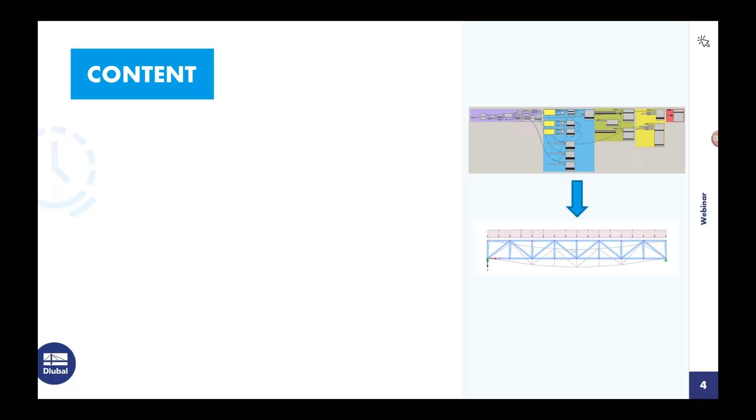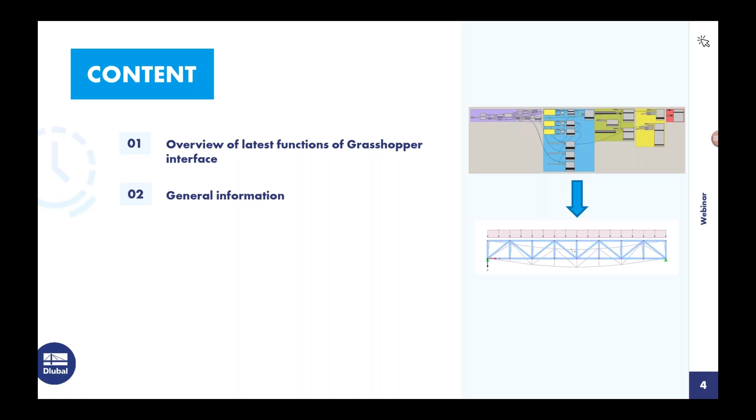Let's have a look at the schedule for today. First, I'd like to start with an update on the latest implementation we developed for the Grasshopper interface. And then I'd like to show some basic information about the installation and the interface itself. And after that, we create a basic geometry in Grasshopper and define all necessary model and load data and export it to RFEM.

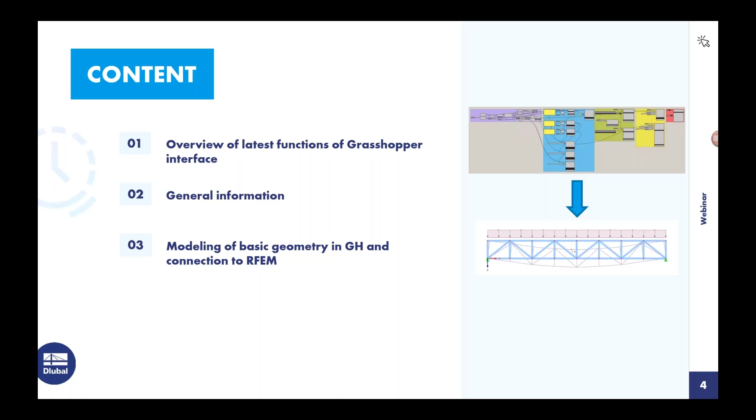So what are the new features we have implemented in the last time? First, when we're using the member component, we can now assign existing design properties to the member for steel and timber design. And these properties are not defined in Grasshopper directly, but we can read them from a template in RFEM. And we have also new components for the definition of imperfections, and at the request of a customer, non-linearities were also implemented in the line hinge component.

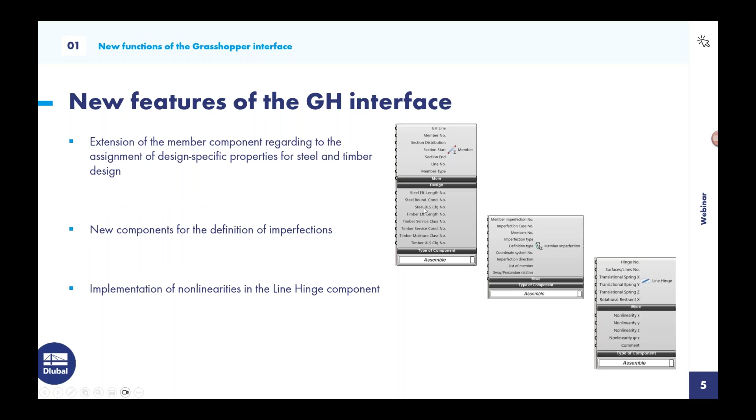And the next new features are that it's now possible to access the templates in RFEM via the export component. So for example, we can now define design properties for steel and timber in a template in RFEM. And these defined design properties we can access with the member component in Grasshopper. And also the export of the polylines has been optimized, and we implemented the new components for closing and opening RFEM files in Grasshopper.

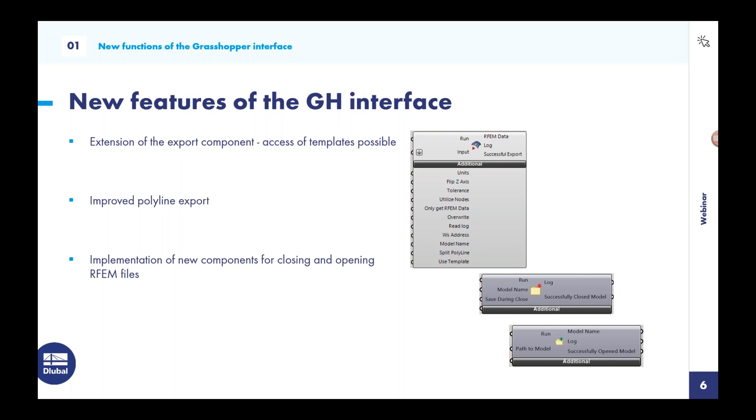And after the installation, we installed two plugins. A plugin for the Rhino RFEM link. With this plugin, we can import and export data between Rhino and RFEM. We can import and export lines and surfaces, and this is limited to the pure geometry. So information about the sections or material thicknesses are not exported with this link.

And in this webinar, we will show you the Grasshopper RFEM link. We have the import and export option as well, with the focus on the export to RFEM components. And the import works in such a way that we are able to read the information defined in RFEM and use it further in Grasshopper. We can export model data like sections, members, thicknesses, hinges, materials, and also supports, as well as load cases and load combinations, and also the loads.

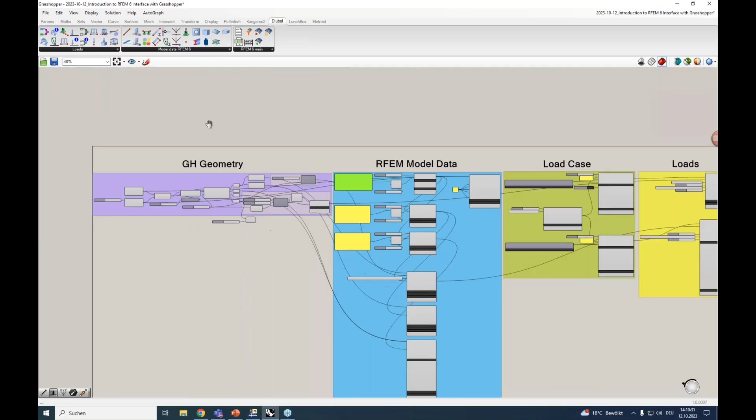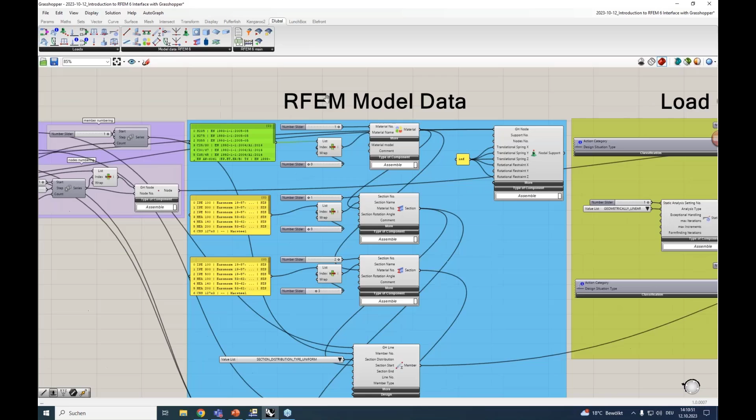We want to model a small structure and then assign to this structure the model data and load data with the help of the RFEM link. Afterwards, we want to export the model to RFEM. So we assign materials, sections, members, nodal supports, load cases, and loads.

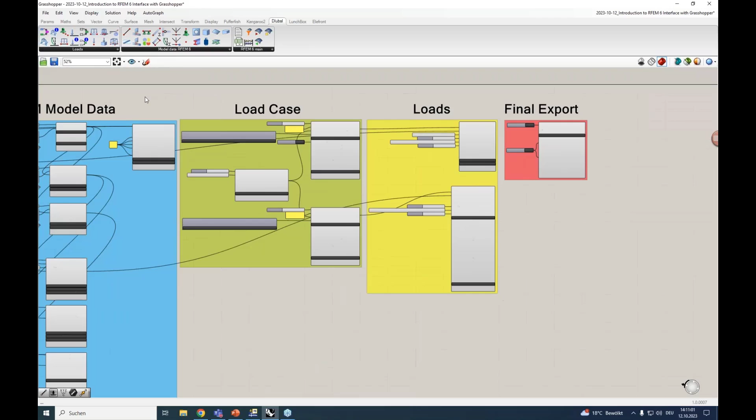We're gonna start today with the geometry in Grasshopper. So we start with a new project, and we'd like to generate a truss girder. I shared the screen with Rhino so we can see how we generate the model in Grasshopper. To start, we're going to generate two lines in the x-axis, and between these two lines we want to generate the truss.

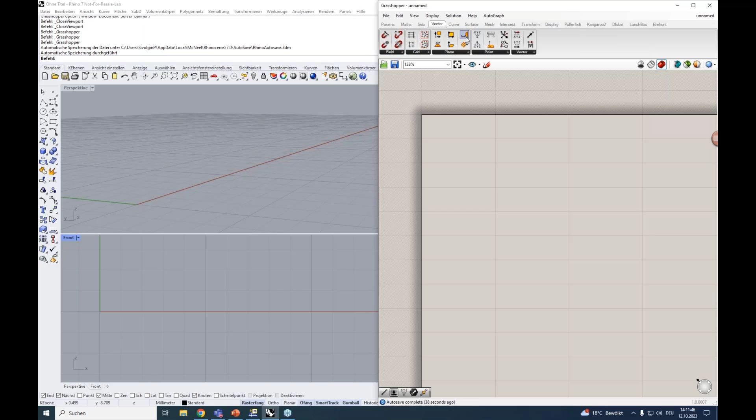First we start with a point. We create a construction point using this construction point component, and afterwards we copy this point by holding down the Alt key. Now we have generated 2 points, and for the second point we want to set up a number slider for the x coordinate, so we can adjust the x coordinate with the slider.

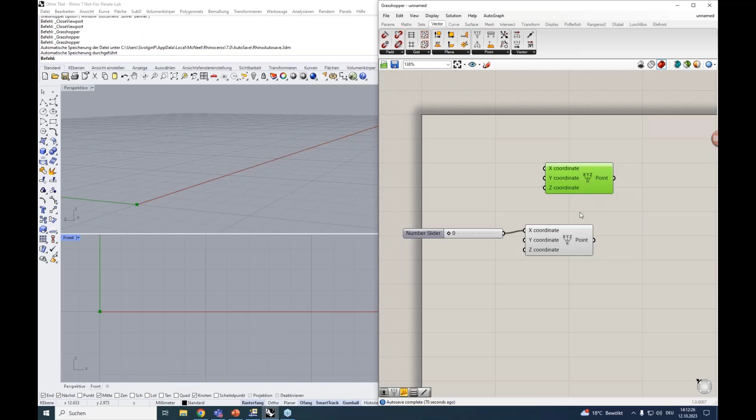We can double click on the canvas to generate a slider between 0 and 15. Now we can connect it to the input of this construction point component. After that, we want to create a line between these 2 points. See, this is the second point we created. And for the line, we use the line component.

You can click the canvas and write the name of the component, or you can also find the component in the curve tab and grab it from there. We need a start point and end point in the input of this component. So we have these 2 points, and now we can generate a line between these 2 points.

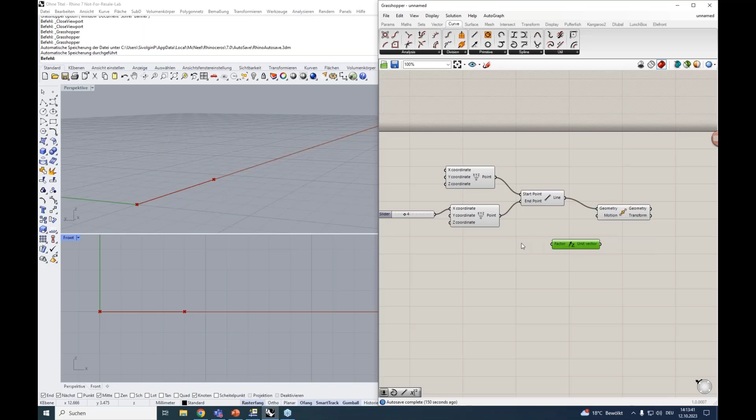Our next step is to copy the line with the move component. Here we have to input the geometry and the motion. The motion is by default set to 10 in the Z direction, but we want to define it ourselves. So we need first the direction we want to move the line in, and we can set up a range again with a number slider.

We want it to move from 0 to 5 in the Z-axis. And if we connect it to our moved line, we see the second line appear here on the screen. After this, we want to generate a truss between these 2 lines, and for this, we use LunchBox in Grasshopper.

Here we have different options to generate a structure. We want to generate a 2D truss between 2 curves. Our curves here are the lines we're using. And between these 2 lines, we can generate this truss.

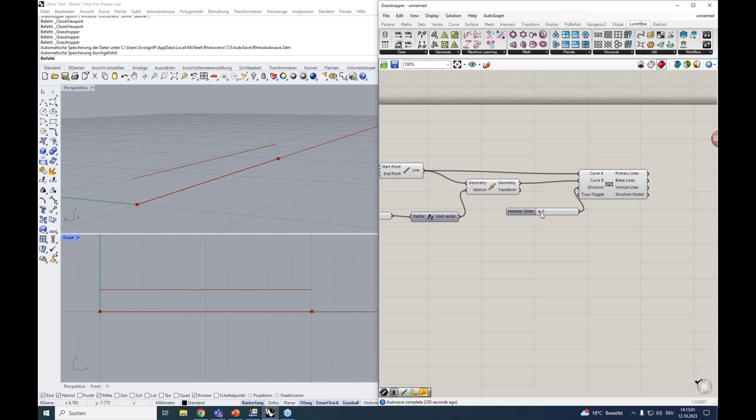And for this truss, we can set a number slider for the divisions. That's the number of bays we have in this truss girder. So we set up again a number slider, and now we can control the number of divisions or the number of bays in this truss girder.

So that's our structure. As an output of this generator, we get different outputs. We have the primary lines, that's the lines for our upper chord and our lower chord. We get the lines for the diagonals, and we get the vertical lines, and we also get the points of our structure.

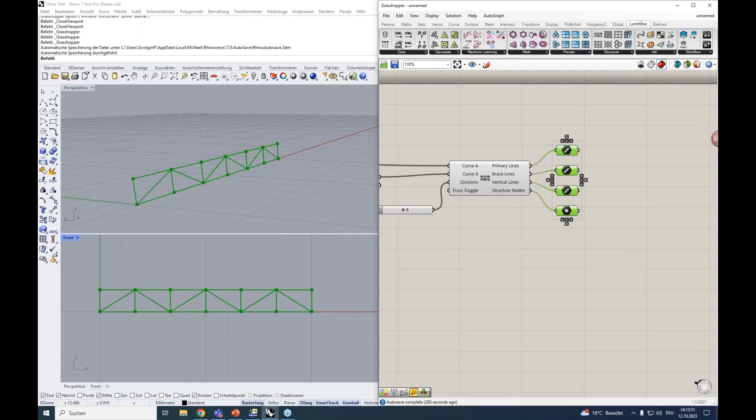So we want to apply now the model data and the load data onto the structure. For this we use these components from the Dlubal tab. And first thing we want to do is to define a material. If we are defining a material, we have two inputs. First input is the material number. This is the material index we gave the material in RFEM.

We can set it as number 1, and the material name can be defined with a panel. So we can say we have this material name here and just put it in the component. But we want to use several materials for this example, or just a possibility to use several materials without having to change the name every time in this component. So for this we can create something like a material library.

I copied this from another Grasshopper file. And this is also just a simple panel with the material names inside we often use. And we can now use this index number in this list to define the material names. And we're doing this with another component, with the list item component. With this component, we can retrieve a specific item from a list.

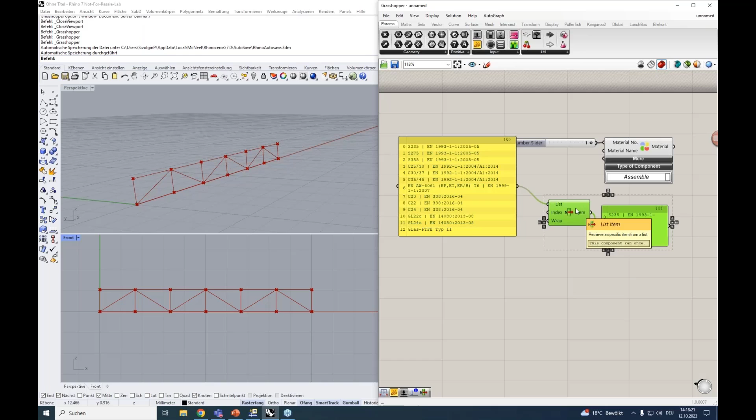And we can access the index number again with a number slider. So we have here all material names. So we generate a number slider between 0 and 12. And in the output, we receive now the corresponding material name. I will quickly show this. So now we can access every material name we defined in this list. This was too much. And this will be the input for our material name. And that's all for the material.

We have now defined the material, and after that we want to define the section. So again, in the Dlubal tab, we have the section component for this. And the section definition is just like the material definition. So we can copy this here, and we want to set two sections, one section for the upper and lower chord, and one section for the diagonals and the vertical lines. So we have section number 1 and section number 2. I predefine it here so we can copy it afterwards.

And the section name is assigned like in the material component, but we use here a different list. We use here a list for the section names. So now we have defined one section. We can look at the input. Further in the input, we have the material number. We have to assign the material number. And here we can take the material number from the material component and assign it to the section component. So we can transfer this number to this component.

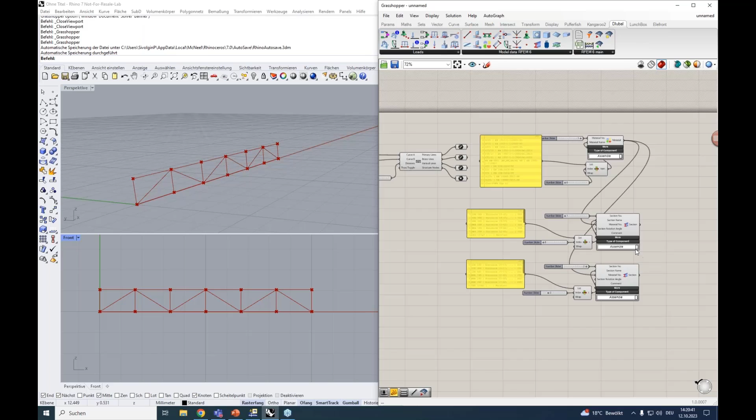If we have defined this section, we can define our members. And these are the members we will assign to the lines of our structure. And here it makes sense to have a separate member assignment for the upper chord and the lower chord, because we only want to apply a load on the upper chord, and it will make it easier later to distribute the load on this upper chord if it's defined in a separate member.

So the first input of a member component are the Grasshopper lines from our structure. So let's look back at our structure, move it a little bit.

We have lines for the upper and lower chord. Here we get a list with all lines for the upper chord and lower chord. And we want to remove the elements from the list, so we only get the lines for the upper chord.

This we can do with a cull pattern component. This component removes elements from a list using a specific rule. So first of all, we need to know which index numbers in this list represent the upper chord. We can look at the index number with the list item component. We look at this list and can look with a number slider at the different index numbers.

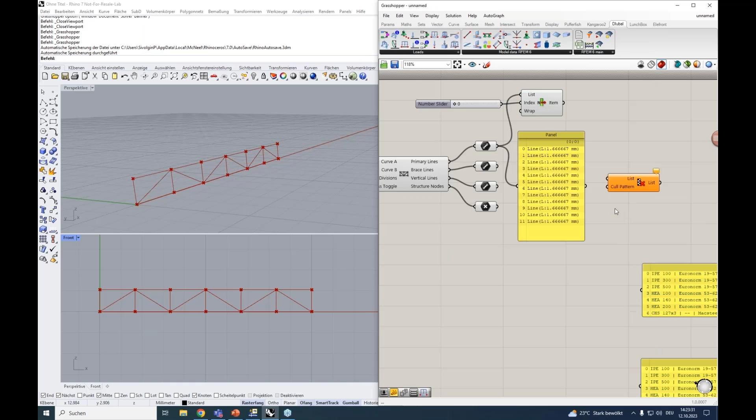We can realize this with this cull pattern component. We can set a rule in this component. We do not want to keep the first element in the list, so we set this to false for the first element. Then we ask, do we want to keep the second element in the list? We say yes, we set this to true. After that, the rule will repeat itself for the entire list. And with this, we get only lines for the upper chord.

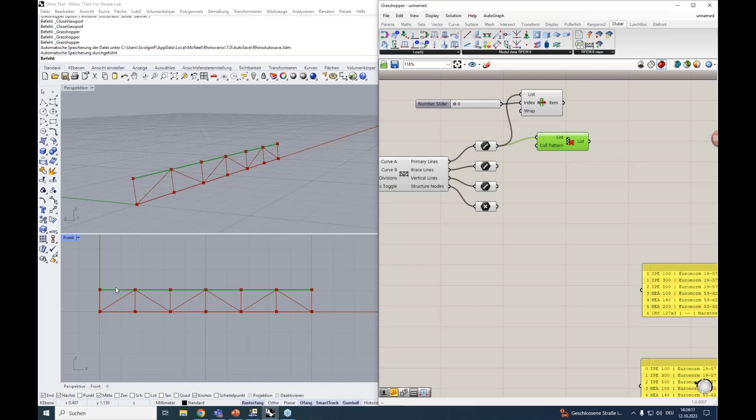And now we can copy this component and invert the rule, so we get the lines for the lower chord. This allows us to separate the member assignment for the upper chord and lower chord. So we define two member components: this will be our upper chord member, and this will be our lower chord member.

The next input in the member component is the member numbering. This is an optional setting, so the number assignment is done automatically in RFEM depending on how we connect the components with the export component. But we need a numbering for the upper chord because loads are assigned to these upper chord members, and the member load component we use later requires the member index numbers the load is assigned to.

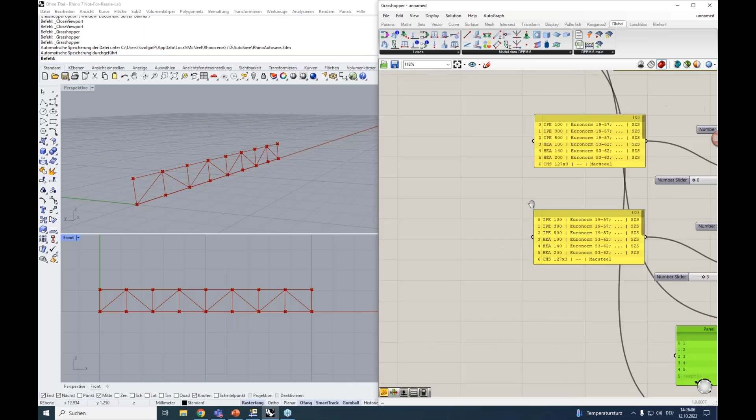For this, we can make a simple list for our numbering, like 1, 2, 3, 4, 5, and so on. And now we can connect this list to our member component. The problem is that the number of lines we have here must match the count of the numbering we define in this list. So every time we modify the structure, the number of lines also changes, and we have to adjust this panel every time. So we need another solution for this problem.

We can generate the numbering differently with a series component. A series component creates a series of numbers. We can start the numbering with 1, and the step size is also 1. The number of lines we have is equal to the number of truss bays we define here. So we can connect this numbering to the count of our list, so we always receive the correct numbering of the upper chord lines.

So we have here 6 lines. If we modify this truss, we always get the correct count for our members. So this will be our member numbering for the upper chord. Let's have a quick look at the member definition in RFEM, so I can introduce you to this component.

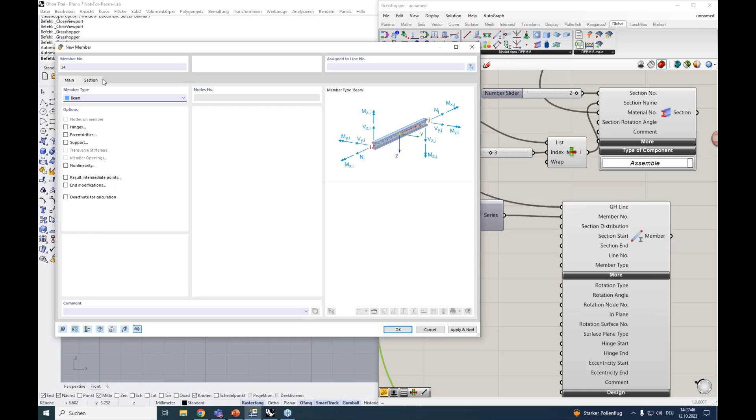Here we have an optional setting for the section distribution. It's by default set to uniform, and we can define this with a value list. A value list is just a list we connect with the input, and we get a list with the possible section distributions we can use. There's also a comment that only uniform and linear are supported for now. But with these we can model most sections we often use. And if we don't put an input in the section distribution, we get the uniform section distribution as default.

Also, we need to assign a section at the member start. It's also like in RFEM. And we also have the possibility to assign a member rotation with an angle, with a help node or a surface. And for this, we have these inputs here.

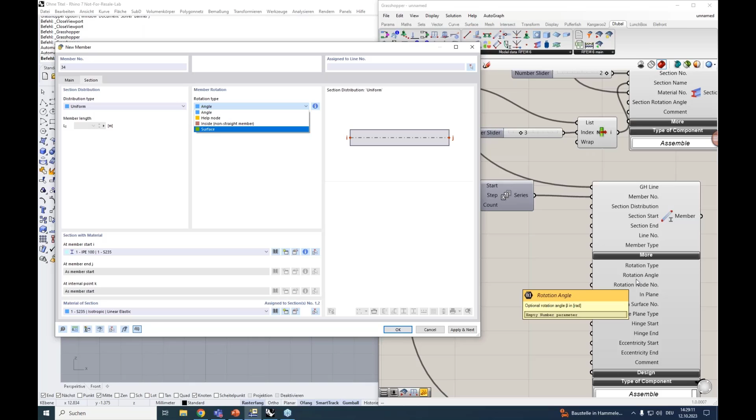And the Grasshopper component also allows us to define hinges or eccentricities for the member. So the only input we need here is the section start. So we can connect one defined section with our member. And with this, we have a completely defined member for the upper chord.

For the lower chord, we use the same member. And here we do not need a numbering because we do not want to link it any further with model data or load data. So this will be assigned automatically in RFEM afterwards. So we also assign a section at the member start. So we choose the same section.

And for the diagonals and the vertical lines, we also generate a member. So we take these Grasshopper lines and connect them to our member. You can hold down the Shift key if you want to put several pieces of information in one input. So we have here two pieces of information for our Grasshopper member input.

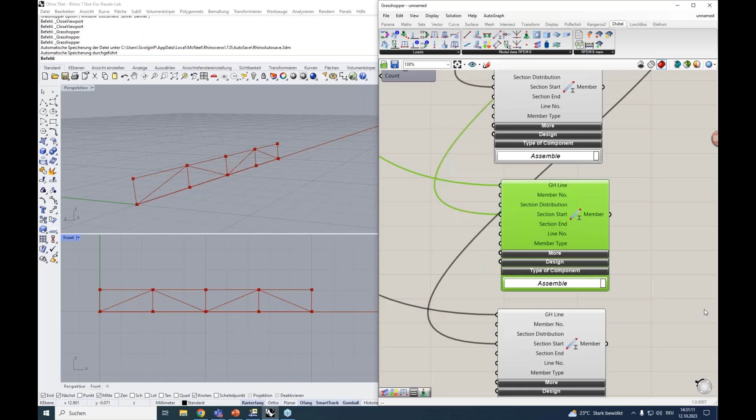Okay, afterwards, we go on with the support for our structure. We can assign a nodal support, a line support, or a surface support. For the structure, we need the nodal support. So we want to define two nodal supports at the edge of the lower chord, and these points we also get from our structure; these are the construction points we used to generate the structure. So we can easily assign these points by holding the Shift key to this nodal support component.

And for the numbering, we can also use the number of nodes as an alternative to the Grasshopper input, but here we use the Grasshopper nodes. Next, we define support conditions. We can define a number or a string. 0 means free, and when we use the expression inf, we can define a rigid support condition.

Here we want to define a hinged support. So we defined the support conditions for a hinged support, and we want to prevent the x-axis rotation. And we have here some more inputs. We can look at this again in RFEM. So if we define a support, we have here some optional settings for nonlinearities, for failure, or for friction, and we can define the friction coefficient also in Grasshopper.

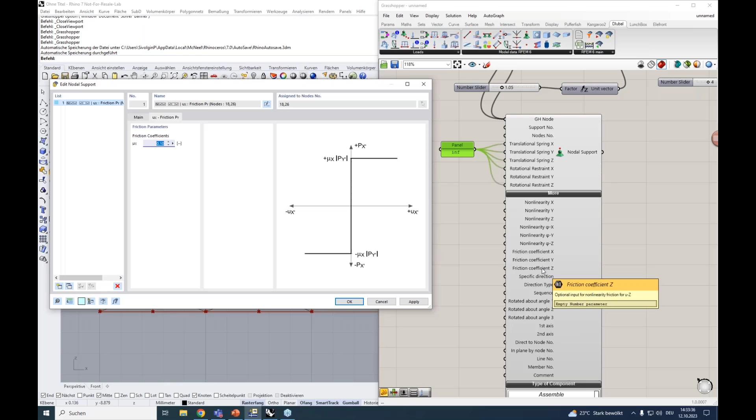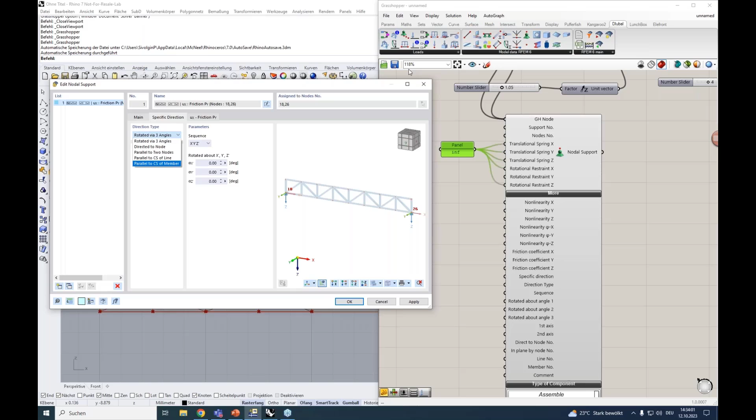And we can set the rotation for the nodal support. Here we have different direction types, and we can set a rotation with one of these direction types, rotated by angle or alignment on a member, node, or line. But we don't need this input in this webinar. So that's everything we need to define our nodal support.

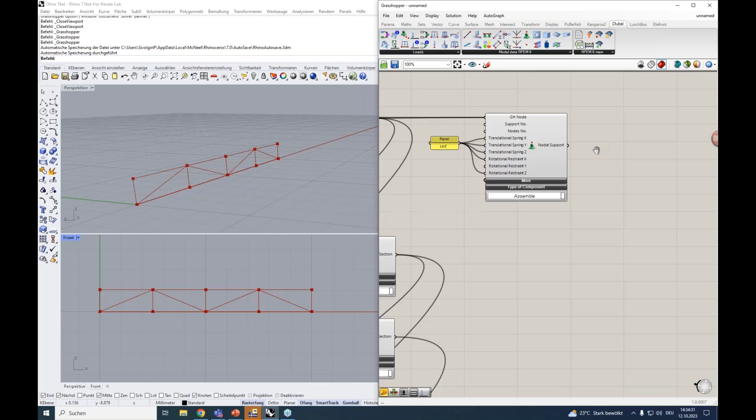And afterwards we can go on with our load data. The structure is finished so far, and now we can generate load cases and loads. At first we define two load cases. For this we'll use the load case component. Here we can assign a load case number. We will generate two load cases, so assign load case number 1 and number 2 to copy it afterwards.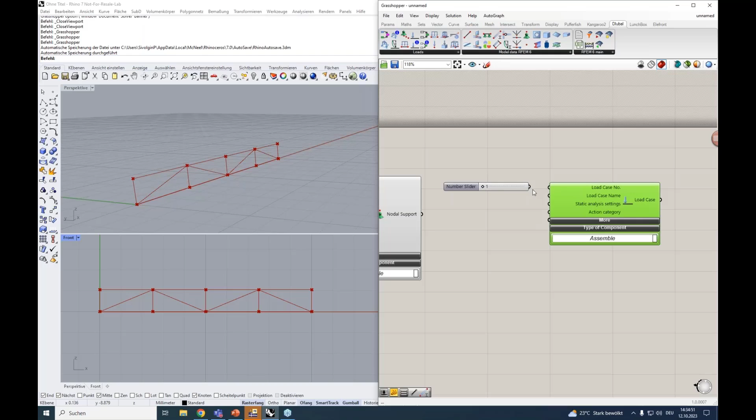We have the load case name. This we can define again with a panel. Let's name it permanent load, for example. Let's make the panel a little bit smaller.

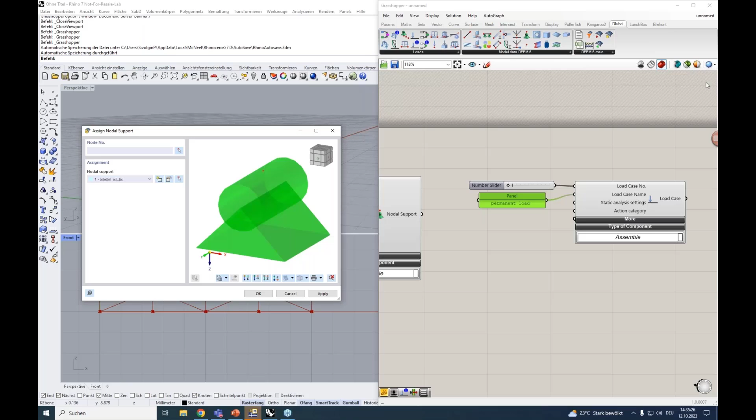And just like in RFEM, we first defined the static analysis settings and the action category. And we can look at this again in RFEM, so it's easier to follow. Here, if you generate load cases, we have the static analysis settings. And for these settings, we use a separate component in Grasshopper. So as you can see, now you can see the static analysis settings.

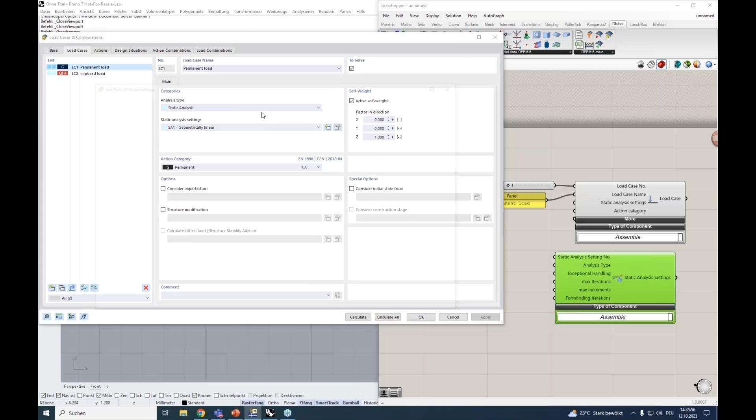So here we have the option to give again a number, and we have the possibility to set the analysis type like linear, second order, or large deformations. And when using tension members, we have the possibility to activate this exceptional handling for failing members so that you don't get an unstable model due to tension members. You find this option here if the tension member is activated in the model.

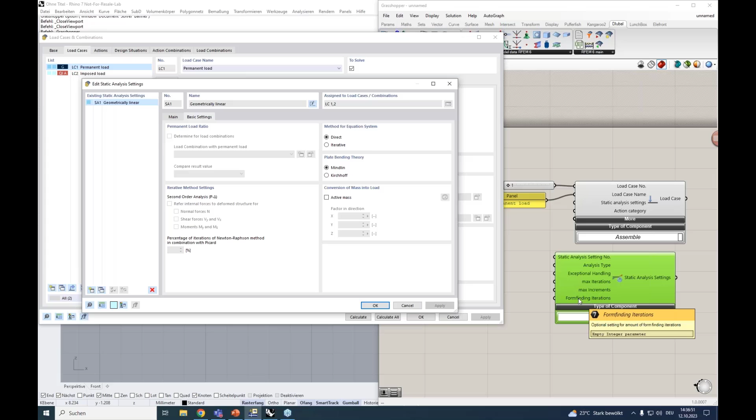And also we have an optional input for the number of iterations and the number of load increments, and some input for the form finding iteration for the form finding add-on in RFEM. So let's define these static analysis settings. First, we give it an index number. That's number 1. The analysis settings are defined by the value list. So we can generate a value list and choose between the options we have here. The other inputs are not necessary for us.

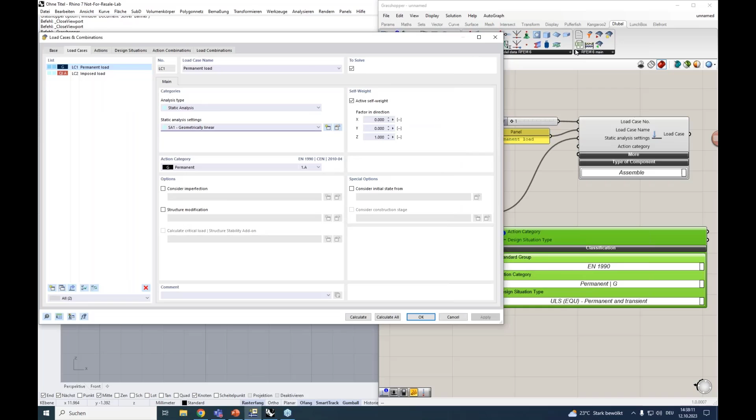Now we can assign the static analysis setting to our load case. Now we're still missing the action category, and the action category is a separate component in Grasshopper. These components allow us to define a standard group, like EN 1990, and select the corresponding action category for this standard group. Here it is important to note that the standard must also be activated in RFEM in the base data. So if you use the standard in Grasshopper, make sure you have the same standard active in your RFEM file.

So we can disconnect again our load case component. And here we have some more options for self-weight adjustments with a factor and the direction of the self-weight. For the first load case, the self-weight is automatically activated in RFEM, so we don't add input here.

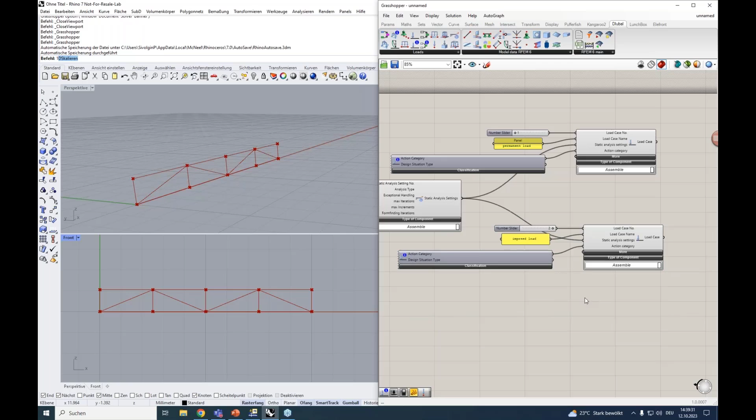Now we want to copy this load case, set it to load case number 2, change the name to imposed load, and also adjust the action category to imposed loads. So that's the definition for our load cases. After the load case is defined, we want to apply the loads. We want to apply a nodal load on the nodes of the upper chord, and we also want to apply a member load on the members of the upper chord.

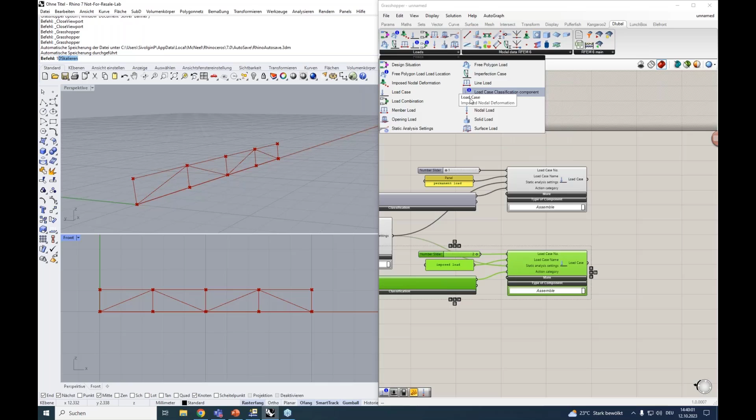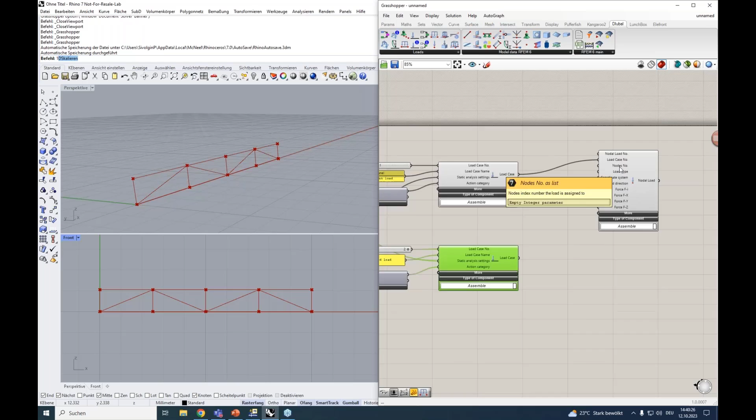In the nodal load component, we can again define an optional index number for the load. We can assign the load case to this nodal load. So we have here load case number 1 and load case number 2. And here we first need to assign the nodes the load is assigned to. For this we have our structure, where we find in the output a list with all nodes of our structure. And again, we only need the nodes from the upper chord.

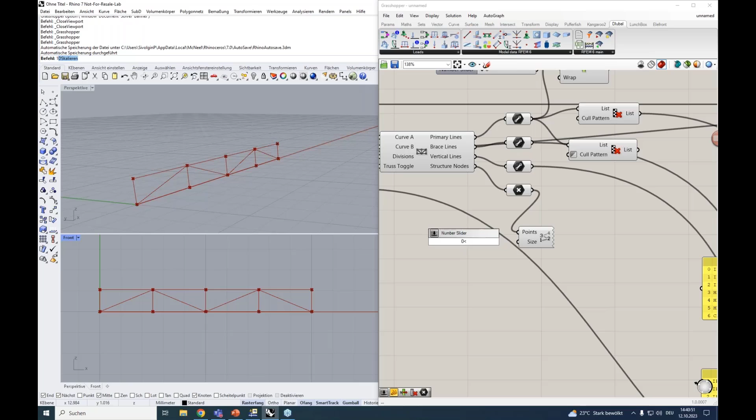With the point list component, we can easily see the numbering of our nodes. You can define the size of these points. So here you can see that we can display the numbering of the nodes directly in Rhino, and we want a load on all odd numbers here at the upper chord. The problem is that RFEM assigns a different node numbering than Rhino. Rhino starts the numbering with 0, and RFEM starts the numbering with 1.

So if we want to assign the nodal loads to the correct nodes in RFEM, we need to define the node numbering so that the numbering of the upper chord nodes in RFEM matches the numbering in Rhino. That means we have this list of nodes, and we want to extract the odd numbers from the list. This is possible again with the list item component, where we take this list and extract the odd numbers.

To do this, we need a series component to create a series of numbers. This series starts again with the number one, and the step size is now 2, so we get all the odd numbers. In the output you see we get 1, 3, 5, 7, 9, 11, and so on. And the value of the nodes we like to number is always 1 more than the number of the bays we define.

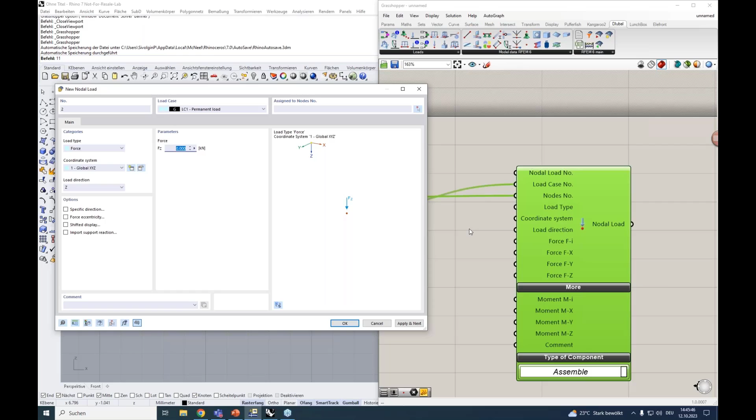So for example, we also can define different load types, and for this we also have the further inputs for the load type definition for the parameters we use in RFEM. So we need a nodal force, so we only need one parameter here. If we start defining the load type, we see it's again a value list, so we can again define a value list for this. We define a simple force.

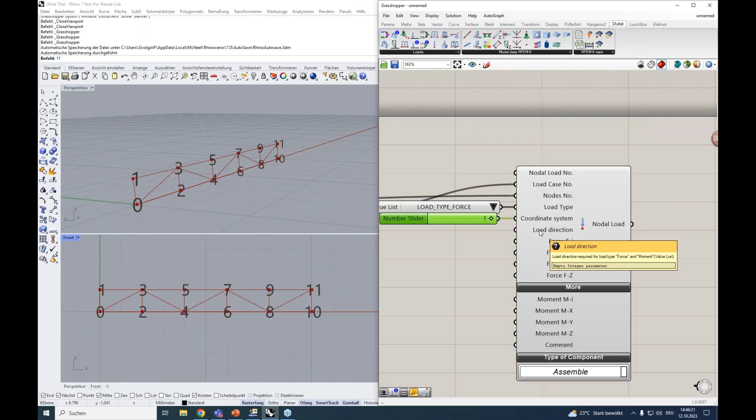For the coordinate system, we can refer to the local coordinate system with the expression local, or we can refer to the global coordinate system with the number 1. We're using the global coordinate system, and the load direction is again defined with a value list. So we can set the load direction in global Z direction. And at the end, we need to define the force. Here the force is defined in Newton. So let's define 3000 Newton as our nodal force. So that's all for our nodal load.

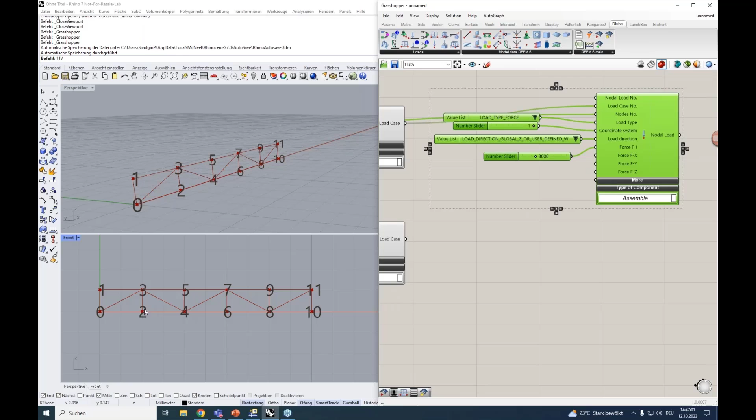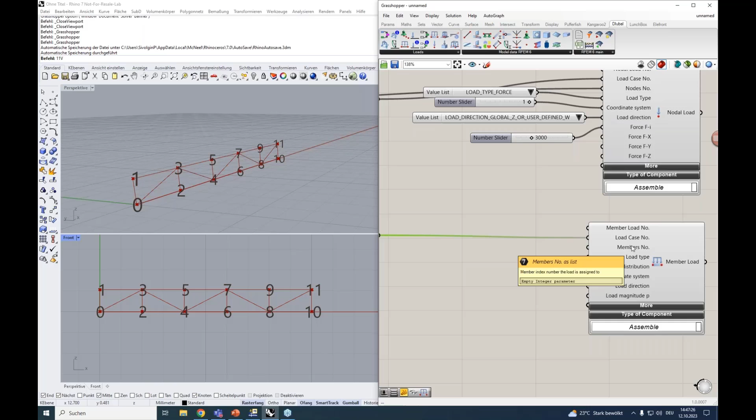After that, finally, we want to apply a member load on the members of the upper chord. For this, we'll use the member load component. Here we have again an optional input for the member load number. We assign our second load case to this member load, and the member index numbers the load is assigned to are already defined for our upper chord. So we take them from our member component. So we have here a definition for our member numbering, and we can take this member numbering for our member load.

The other inputs are again the same as in RFEM. We define a load type, a load distribution, coordinate system, and load direction. Let's look at it. So when we insert a new member load in RFEM, the load type is set to force by default, and the load distribution is set to uniform by default. And the same logic applies also to this Grasshopper component. So if we don't give an input to this load type and load distribution, it's assumed to be the default setting, and here it's the force and uniform setting. If we want something different, we can use the value list to define other categories for the load type and load distribution.

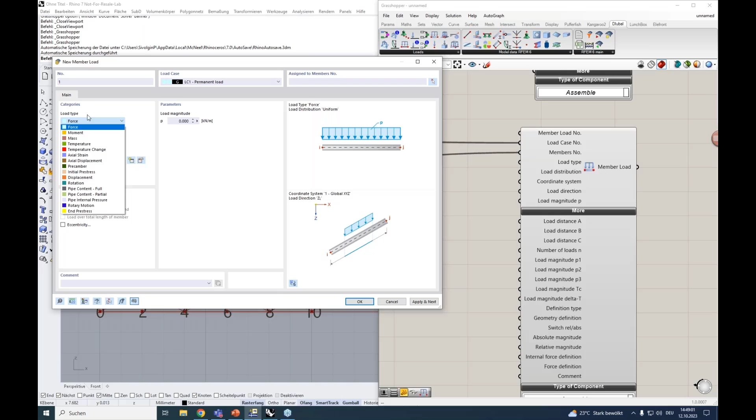Here we see also different inputs for different load types. So depending on the load type or the load distribution we define, we have here the different parameters we need to access. And here you have the possibility to access most of them. Not all load types are implemented; the most common are available. So with this, the input of the components remains manageable if we don't add every single parameter.

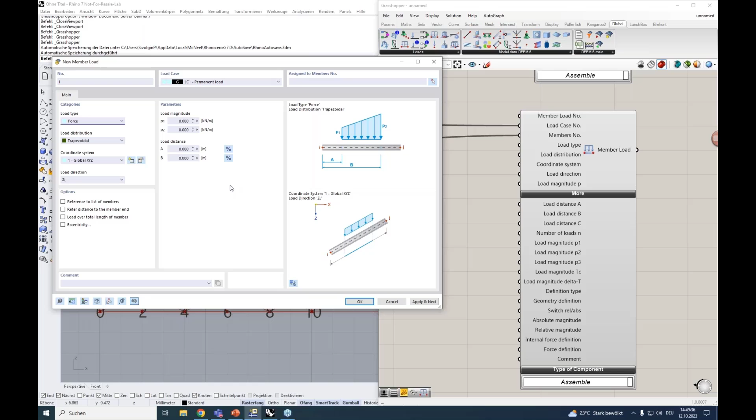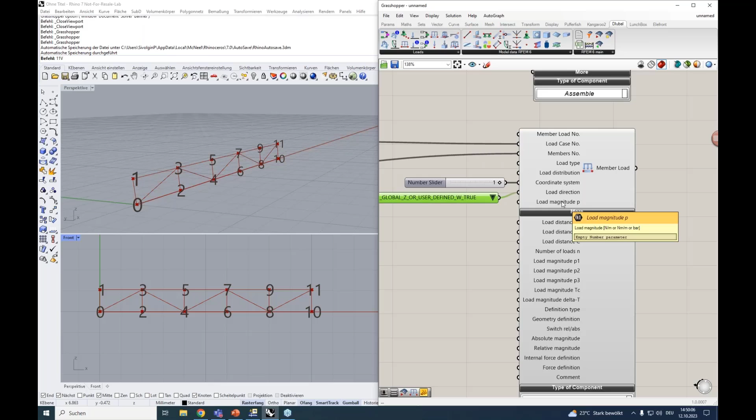And so the only thing we need to input here is the coordinate system. We refer again to the global coordinate system with the number 1. We can define a load direction again with a value list. Load direction we define as global Z in the true length. And we define the load magnitude again in Newton per meter. Let's say 2000 Newton. And with this, the member load component is ready.

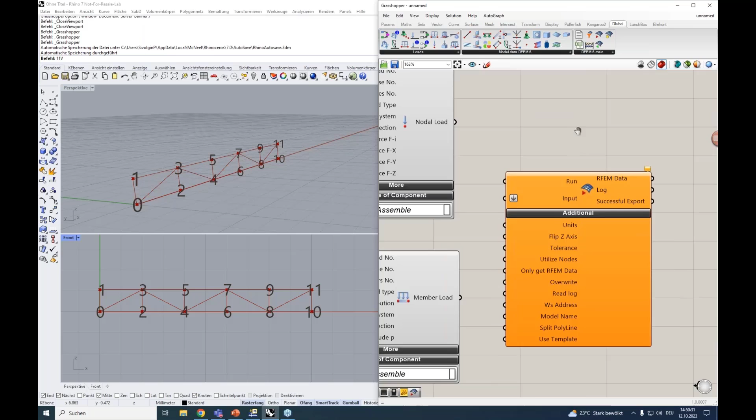And now we want to export this data to RFEM. For this, we use this export component. First, the export component must be connected to the defined data. So we need an input for this component for the model and the load data we defined. So we have the material, the sections we defined, the members we defined, also the nodes here, our nodal support, the static analysis settings, our load cases, and finally also our loads.

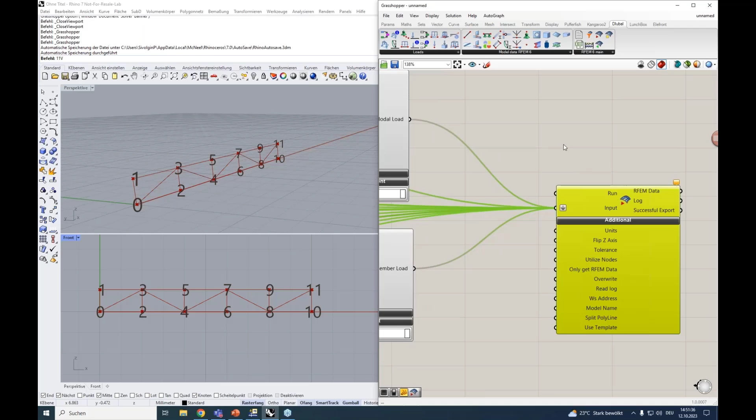So we can run the export once with a button. For example, with this button we can run the export once, or we can use a Boolean toggle. And with a Boolean toggle, we can create a live link between Grasshopper and RFEM. So we can set it on true, and the connection remains active between Grasshopper and RFEM.

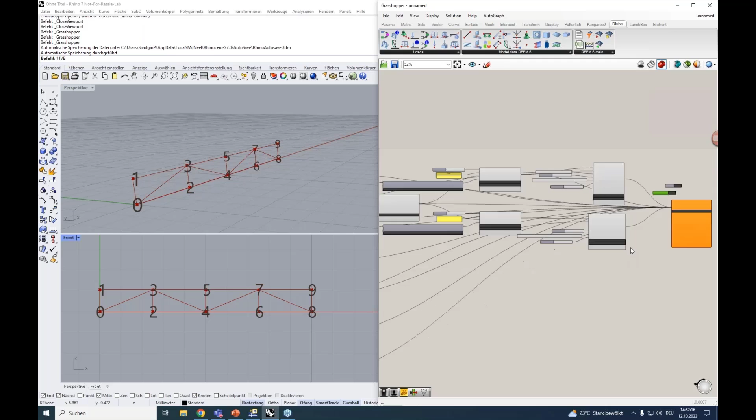So if I adjust some parameters in Grasshopper, like here, the RFEM model will be automatically updated as long as this Boolean toggle is set on true. There are some other inputs we need to fill. So we want to overwrite the model in RFEM, and we also want to flip the z-axis.

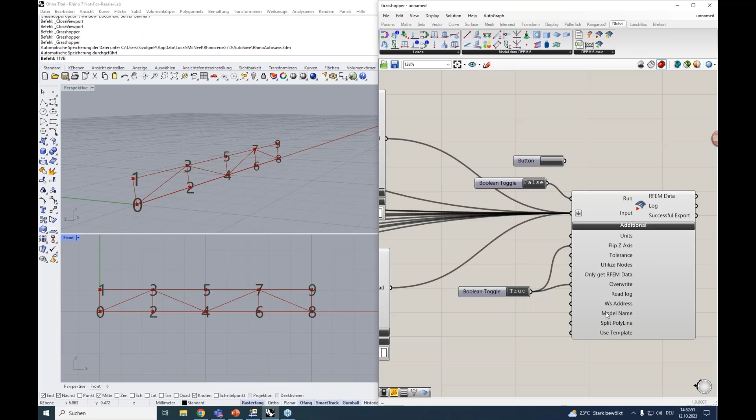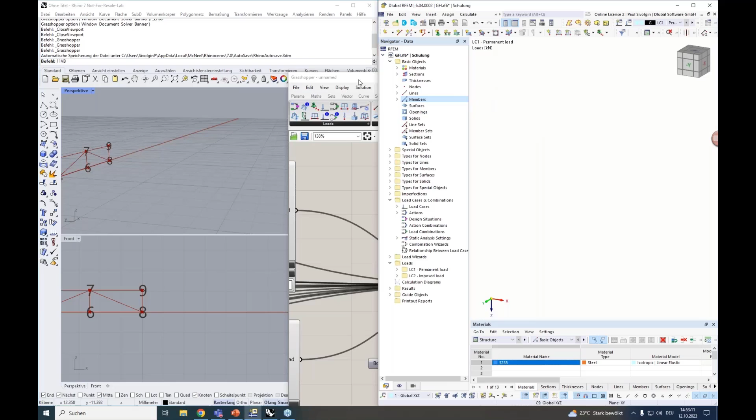If we want to generate a new model in RFEM and don't overwrite a model, we can also define a model name, and a new model will be generated in RFEM. So let's look at the export in RFEM directly. Let's move RFEM on the screen so we can see the export. I will delete all data in this file here. And if we set the Boolean toggle on true, the export will be started.

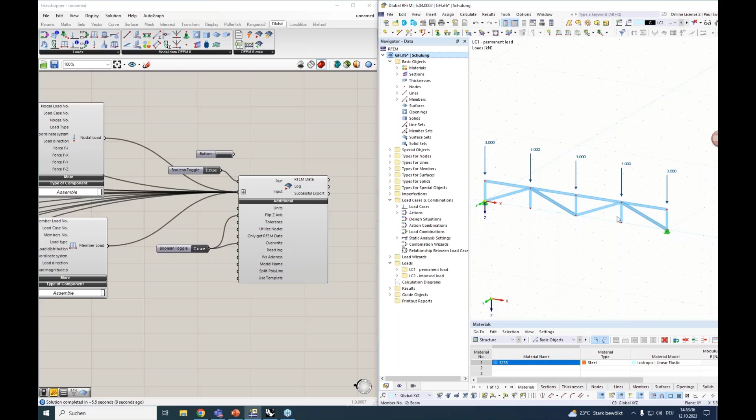Okay, I forgot something. Maybe we're missing the lower chord. So we can check if we connect the member with our export component. Why is the lower chord missing? The member is missing for the lower chord. Let me check this. Okay, these are the lines for our lower chord, and we didn't assign them to our member. We got the wrong input here.

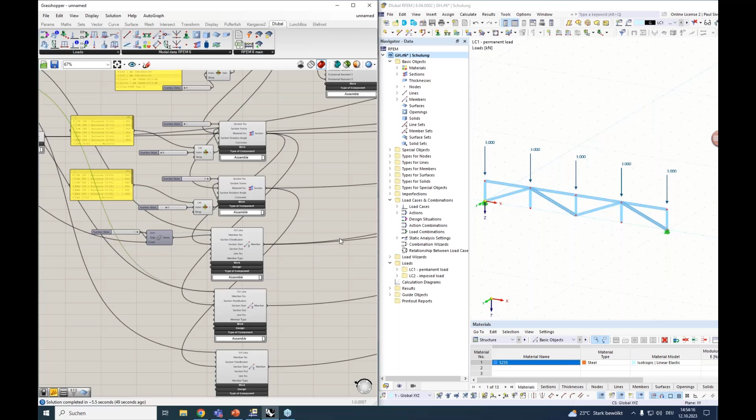So as you can see, we have a live link. So if we change something here, okay, we have the wrong assignment for the diagonals and the vertical lines. I will correct this fast. I can disconnect. This was connected to our upper chord. You see, if I work on this model, the RFEM model is also updated.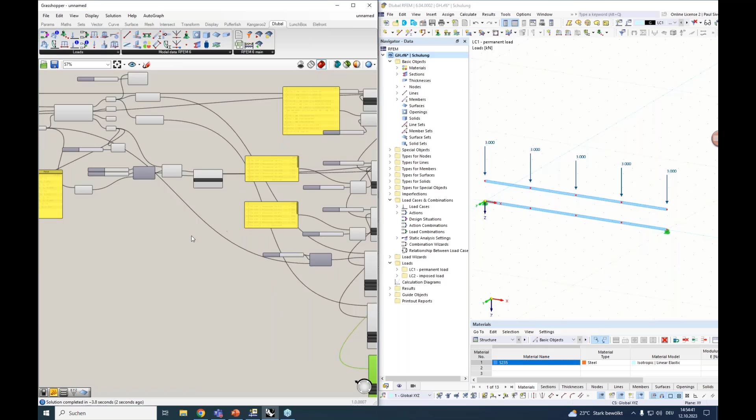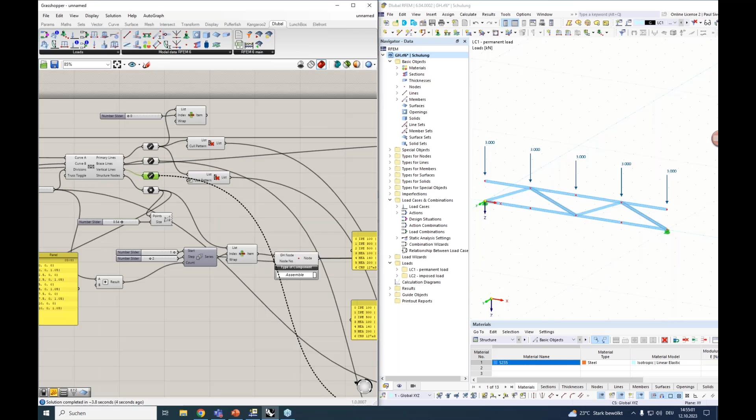So here we have the lines for the diagonals. Set it in this input and see the update. And we have here the lines for the vertical lines. So now it should be correct. Yeah. So we have now exported the model to RFEM.

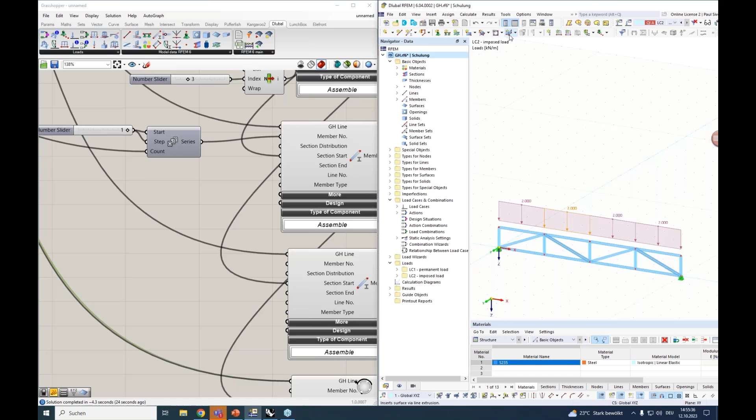You can see the structure is exported, the supports are defined, the load cases are defined, load case 1, load case 2, and also the load is assigned. Now you can continue working with this model in RFEM, start a calculation, create load combinations, or start analysis or design calculation. And so that was the basic introduction into the Grasshopper RFEM interface.